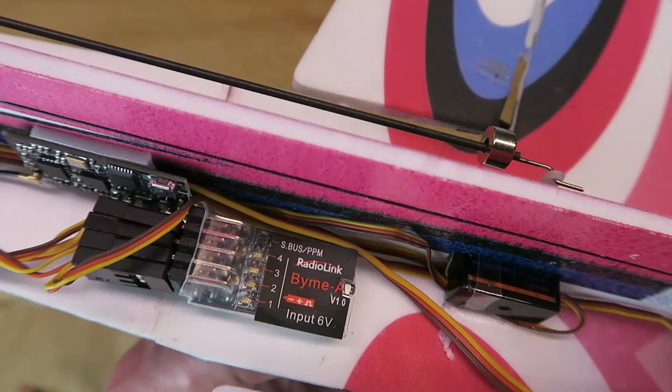Recently I built this Sakura model utilizing the RadioLink Byme-A. Not only is it an SBUS or PPM to PWM converter, it is also a 6-axis flight controller, 3 axes for the accelerometer and 3 axes for the gyroscope. That enables it to be configured in up to 5 different modes: a stabilized mode, gyro, acro mode, a vertical mode, hang off the prop I guess, and with them all switched off, a manual mode.

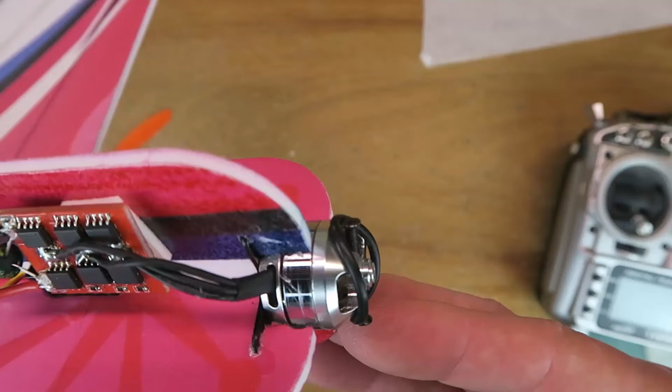First things first, please remove the propeller. Especially with this type of flight controller, the motor can start up at almost any moment if you get something wrong. That's especially true when trying to test it in its vertical mode. Other important things to note is that it must be installed on the fuselage either this way up or through 180 degrees. It will work out itself when it initializes which way up it is.

I've soldered on this little FrSky compatible receiver. Note additionally that on the end of the unit here there is a tiny push button which is used to reverse any of the servos that you need reversed for your particular model's layout. Important point here, only reverse the servos using this module. Do not reverse them on the transmitter or things simply won't work. Don't ask me how I know that.

Without further ado then, let's take a look at how the transmitter is set up for the 5 different modes. I'll show you first how the transmitter is set up.

Throttle disabled, manual mode. I've assigned the 3-position switch here to be one of the mode selections and this one as the other. These are on channels 5 and 7 as we will see in the documentation. I've elected to start up in manual mode. So we have manual mode, gyro mode, stabilize mode, gyro mode, manual mode. That's the 3-position switch here. If we now change this switch and go again, acro mode. We have acro mode, vertical mode, and vertical mode. So acro mode, manual mode. Let's take a look at the documentation and we'll go through the setup of the transmitter using the OpenTX companion.

The documentation provided by RadioLink is more than adequate. Although it's oriented towards their own transmitter, it has all the information that we need to be able to set up a different transmitter. I should mention at this point that I have contacted RadioLink as I had a question, and they were very helpful and responded within 24 hours. Also, I'm indebted to Martin King in the UK, who also provided some valuable information on setting up this guy.

The introduction essentially describes what I've already told you. It's worth mentioning though that there is another variant of this called the byme-d, which is specifically set up for delta wings. If you want to use a flying wing, then seek out that variant and there will be links in the description to both.

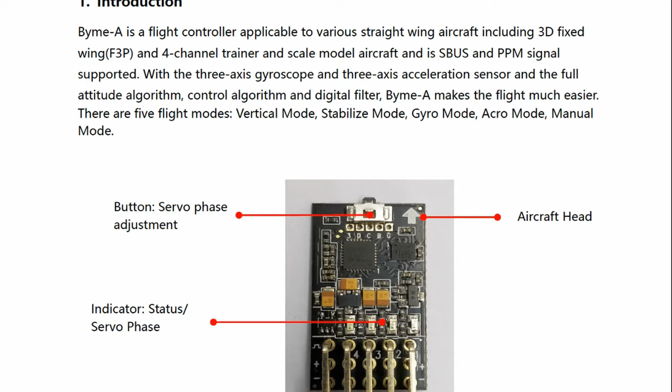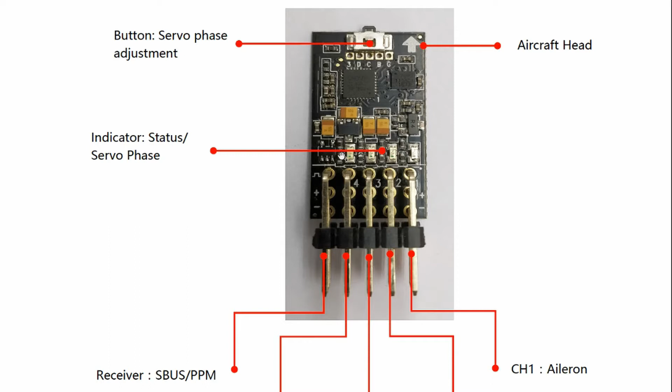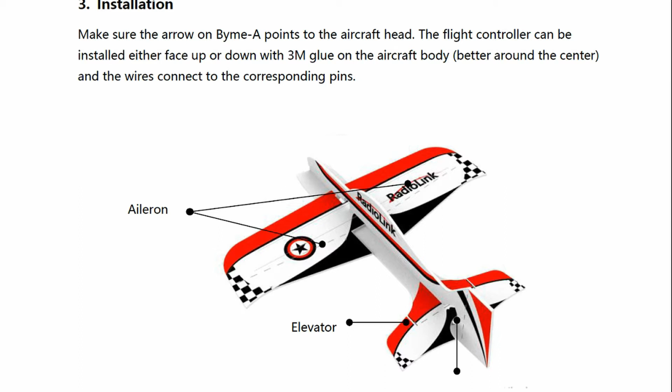I showed you this on the model pointing towards the front and the orientation. There are 4 LEDs that indicate the status and also the servo phase, or whether it's reversed or not. The connections have to be in this order, obviously the SBUS here, and then from channel 1, aileron, elevator, throttle and rudder. The installation is described using the RadioLink's own model, which is the A560, and here we see the description of the 2 channel switches.

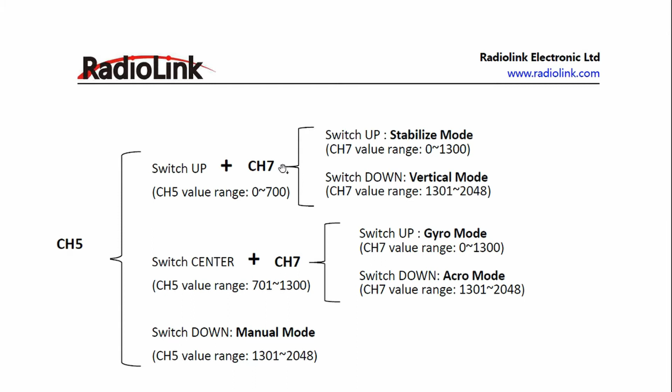We saw I have channel 5 assigned to one 3-position switch and channel 7 to another, although I'm only using the 2 positions. These 2 points are very important. You must keep the model still when it's powered up so that the gyro will calibrate, and you'll see the red-green flashing until calibration has been done, and then we get a fixed light. The attitude calibration is defining how the plane should fly in its level configuration. So it will be slightly nose up, and you can obviously adjust that by keeping the nose up at a certain height whilst you perform this attitude calibration.

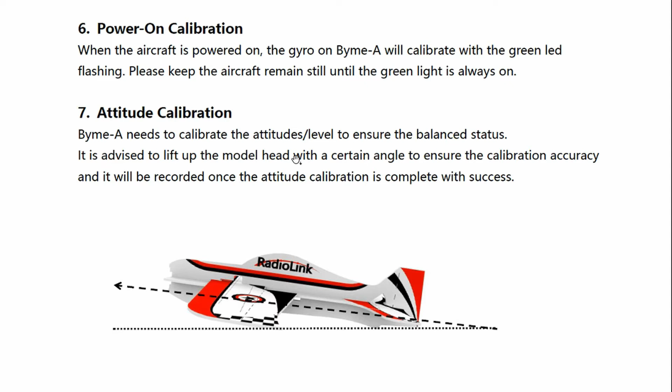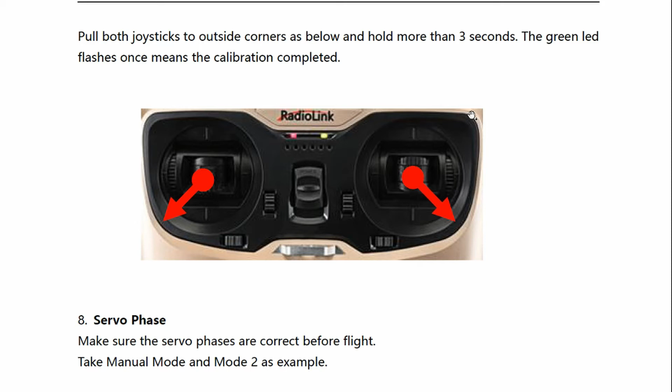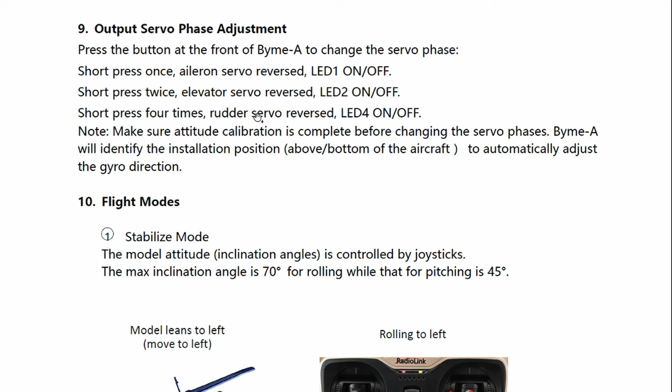This is done by moving the control sticks on the transmitter. That is shown using the RadioLink transmitter here. Because I have two of the servos reversed, in my case, this stick, yes, it goes down and towards the outside, but in my setup, I have to go up into this corner here, so it's the other way round. Here we see the description of how to reverse the servo direction using the module, and it's the little switch on the front that I showed you. So you press it once for the aileron, twice for the elevator, and 4 times for the rudder. There is no provision for reversing the throttle.

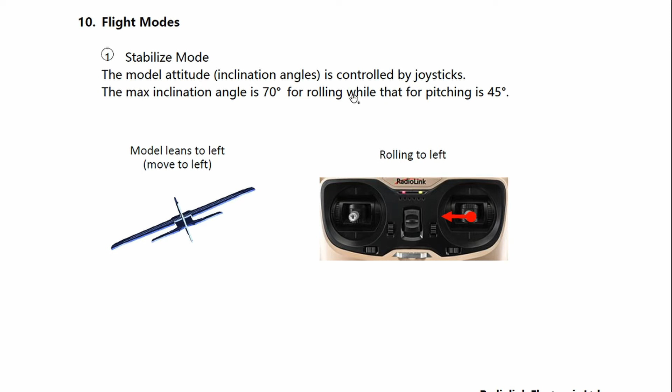It then takes you through descriptions of all the different flight modes. The stabilized mode restricts the amount of inclination and rolling angle. Vertical mode, stunt mode, 3D mode, call it what you will.

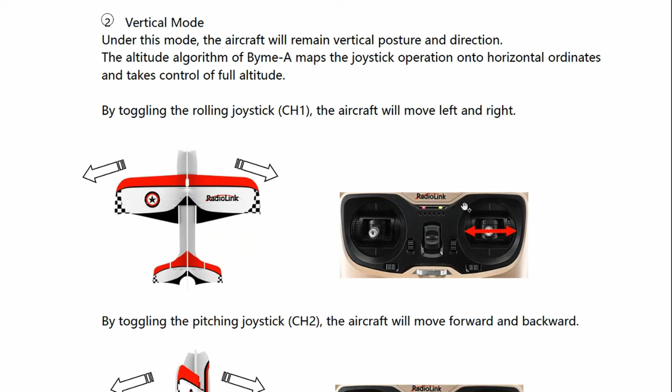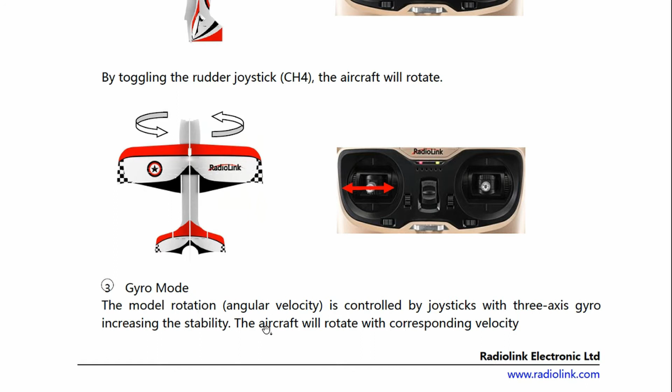The flight controller maintains the altitude, and you can move the plane left and right, forward and backward, or rotate it. In gyro mode, the model rotation is controlled by the joysticks, with the 3-axis gyro increasing the stability.

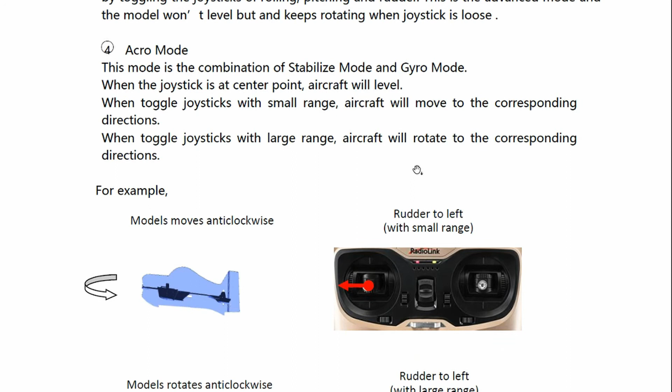It's probably easier to experiment with these things than try and work out from the descriptions. And finally, manual mode has no effect from the gyro whatsoever.

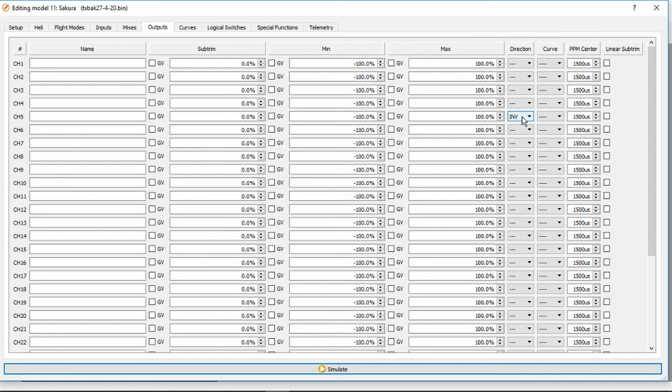Now let's simulate the radio. Throttle disabled, manual mode. If we flip the screen here on the transmitter simulation to the outputs, at the top these squares represent the logical switches.

So again, with switch G and SC in the up position, we have gyro mode, followed by stabilize mode. If we now put SC in the middle position, we have acro mode, vertical mode. We have successfully set up our switches.